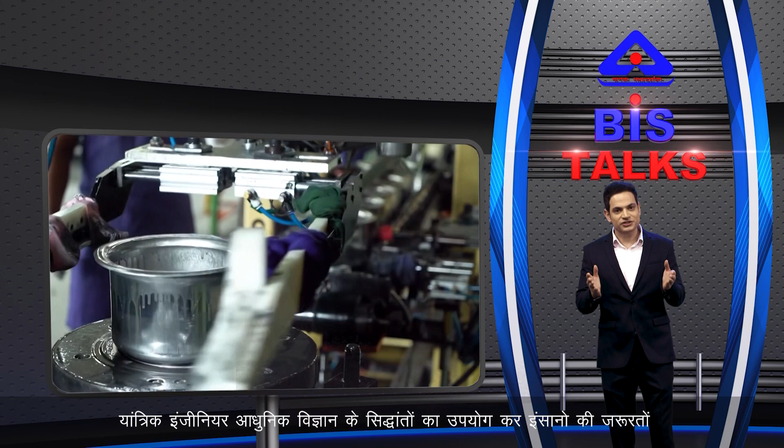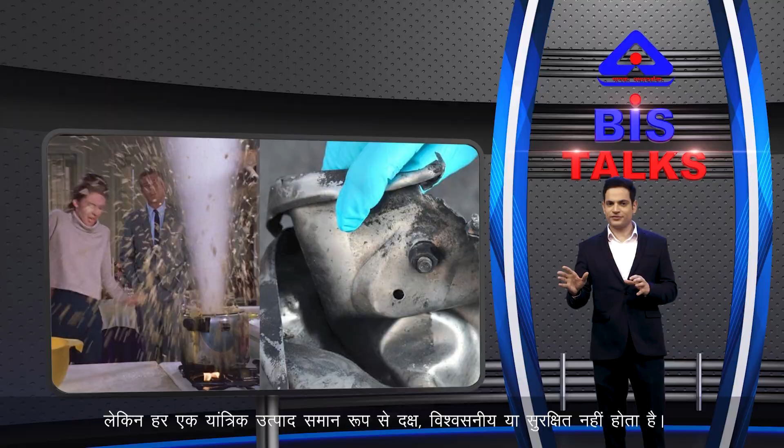Mechanical engineers use principles of modern science to create machines to meet a wide range of human needs. Hence, the objective of mechanical engineering is to create products that complement modern living in every way. But every mechanical product is not equally efficient, reliable, or safe. That's why it becomes even more important to make them follow seamless quality parameters specified in the BIS standards. When it comes to setting standards in India, the Bureau of Indian Standards is the ultimate authority.

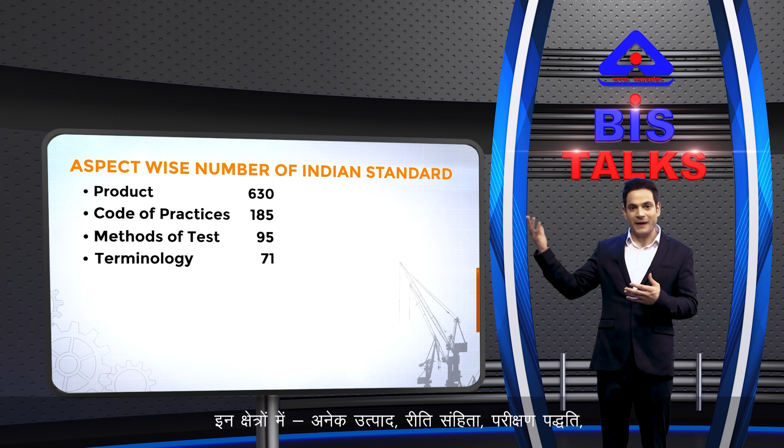Till date, the Mechanical Engineering Department of BIS has formulated around 1,356 standards. The division is responsible for a vast number of areas within its domain, touching our lives in multiple ways. These areas cover products, code of practices, methods of test, terminology, among many others, which we have listed here for you. BIS officers do not formulate standards in isolation. There is a streamlined mechanism to involve all relevant stakeholders of the particular field in the process of standard formulation. Let's first hear from the chairman of the council.

Mechanical Engineering Division of BIS oversees standards for heavy engineering, serving the core sectors of economy such as energy, mining, transportation, as well as the light engineering sector encompassing consumer goods to utility products. MEDC is organized with 28 technical committees entrusted with the responsibility of formulating, updating, and adopting standards needed for the products and processes. The technical committees are headed by industry experts in the respective domain to bring in latest concepts and standards needed for upgrading Indian products to compete in global markets.

MEDC is playing a pivotal role in evolving and upgrading standards, thereby uplifting the quality benchmark to make products globally competitive, which is vital for sustaining economic growth and boosting Indian economy. Let's hear from the head of the department who leads the effort of setting standards in BIS for the Mechanical Engineering Department. It is the constant endeavor of BIS to formulate standards and revise standards that are in line with national priorities and emerging technologies.

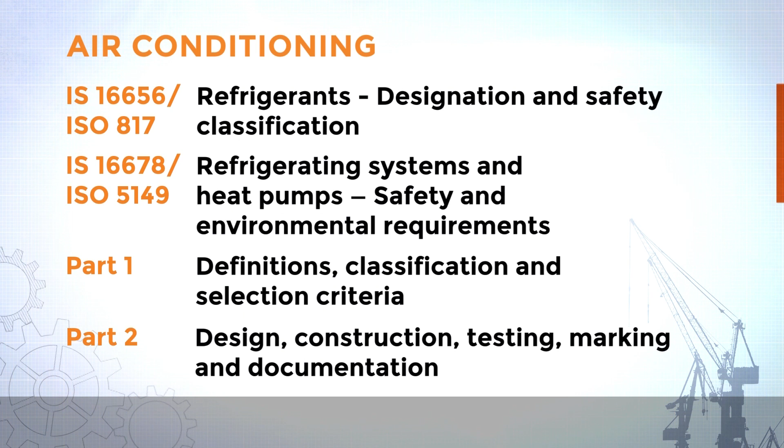Have you ever wondered what modern life would be without a refrigerator? I mean, not just about the ice and cold drinks, but the huge lot of conveniences they offer in terms of storing food and other stuff. Refrigeration helps in preservation of food and beverages, which in turn affects the health of an individual. It is also a source of income generation for small shops which sell commodities with limited shelf life.

Modern life also demands commercial refrigerating appliances like deep freezers, walk-in cold rooms, and display cabinets. I think you will agree with me that to be completely efficient and effective, they too need to follow seamless standards. Let's get more clarity on the subject from our expert.

The standard on household refrigerating appliances has been revised recently, where the direct cool and frost-free technology have been merged into a single standard. This standard specifies the essential characteristics of household refrigerating appliances cooled by internal natural convection or forced air circulation. The tests defined in the standards are meant to assess the fundamental design and operation of refrigerating appliances.

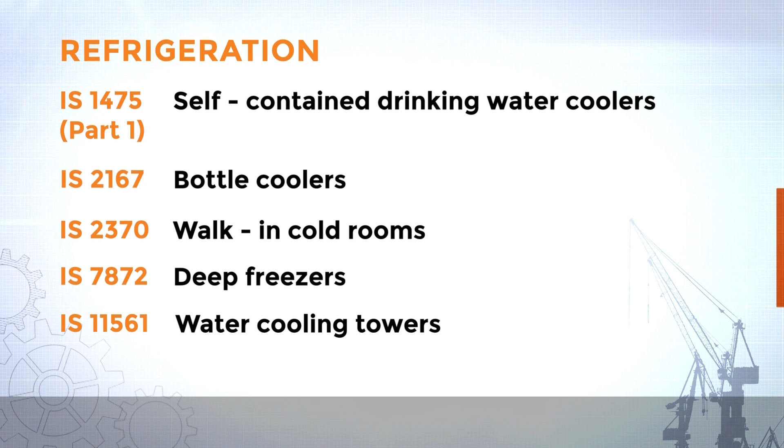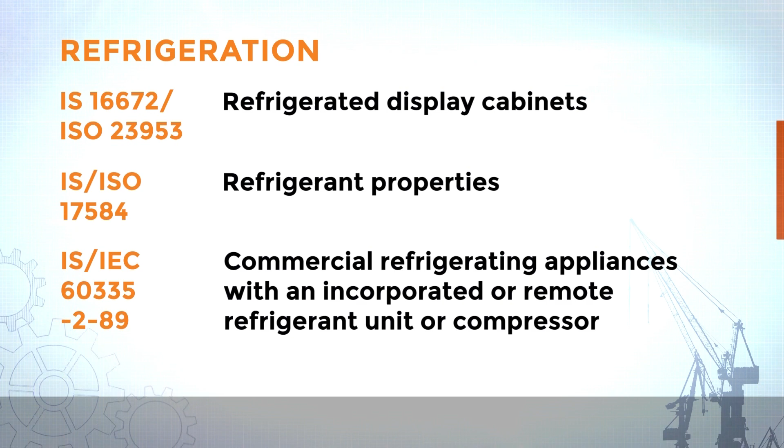Various tests such as storage test, cooling capacity test, freezing capacity test, mechanical strength test, electrical safety test, etc. are specified to ensure performance and safety. Here is the list of some of the key standards under this area. Let's move on to our next subject.

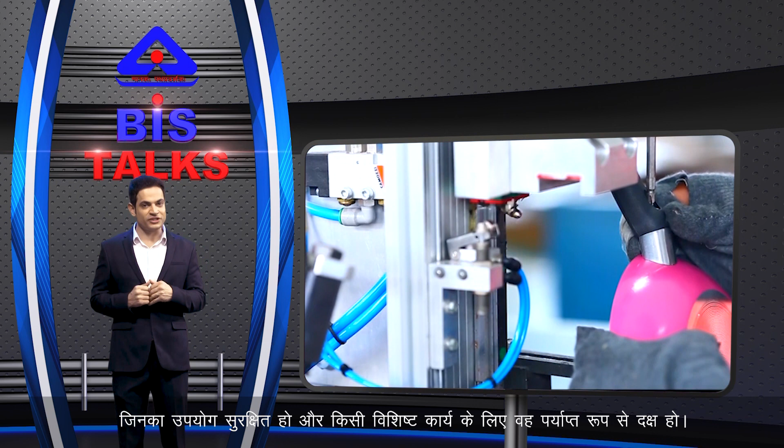I think there is no doubt in any of us that it's absolutely necessary to pick the utensils that are safe to use and efficient enough for the specific function. Also, the pots and pans we use for cooking and eating have to follow stringent quality parameters since they directly affect our health.

The most visible sign of implementation of these BIS standards could be seen on the humble, everyday pressure cooker. The pride of every kitchen should come with an ISI mark, that's for sure. IS 2347 covers the requirements for domestic pressure cookers.

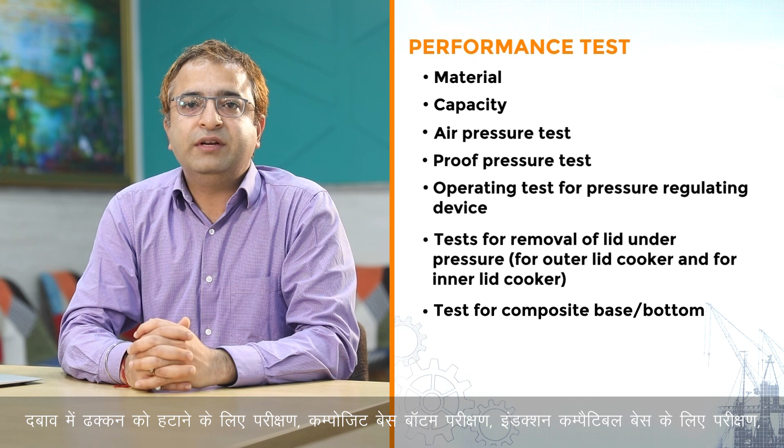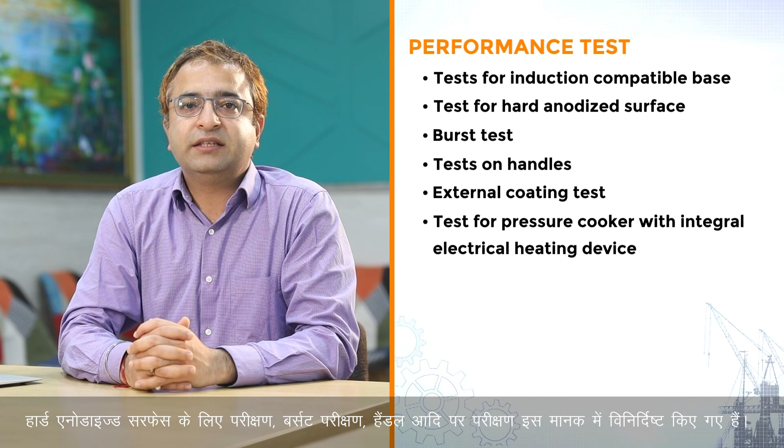To ensure the safety and quality of pressure cookers, performance tests like material, capacity, air pressure, proof pressure, operating test for pressure regulating device, test for removal of lid under pressure, test for composite base or bottom, test for induction compatible base, test for hard anodized surface, burst test, tests on handles, etc. have been specified in this standard.

Now for the other pots and pans we use to store, cook and eat food. Their quality too has a direct bearing on our health. For instance, the standard IS 14756 prescribes general requirements, quality of material and thickness for stainless steel cookware. IS 14756 lays down the requirements of cooking, serving, storage type of stainless steel utensils.

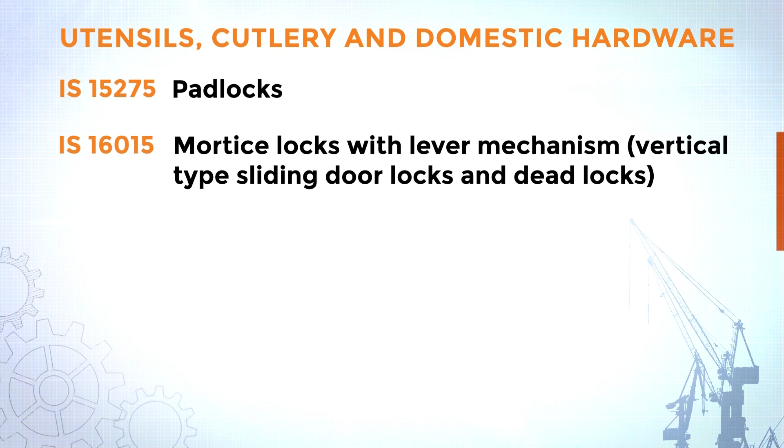To ensure the safety and performance, tests like material, staining, mechanical shock test, thermal shock test, dry heat test, coating thickness test have been specified in this standard. Other important standards under this area are listed here. Let's move on to our next subject.

Cooking gas mostly comes in the form of LPG or liquefied petroleum gas. This is the go-to cooking solution that we are so familiar with, and the risk factor gets minimized to negligible through the standards set by BIS. Let us now understand this better with a manufacturer who will acquaint us with the value of standards.

IS 3196 Part 1 standard is for manufacturing cylinders for liquefied petroleum gases (LPG). As all are aware, the LPG cylinder is an integral part of the kitchens for cooking purposes. This standard lays down the minimum requirements for the materials, design, manufacture, construction, tests and marking on these cylinders. Depending on the capacity, the construction can be a 2-piece or a 3-piece cylinder.

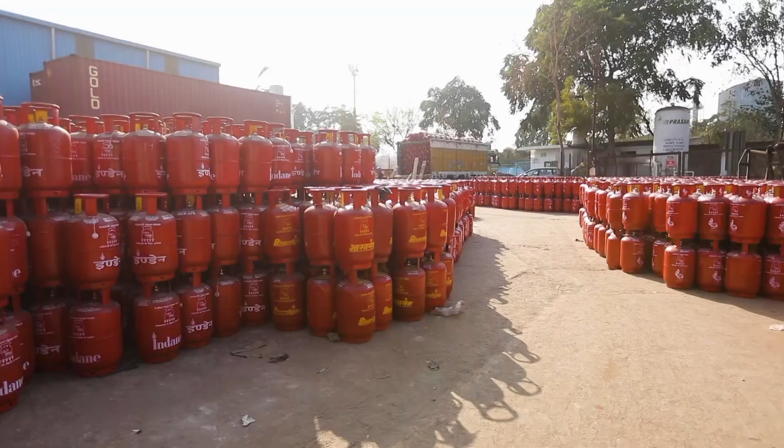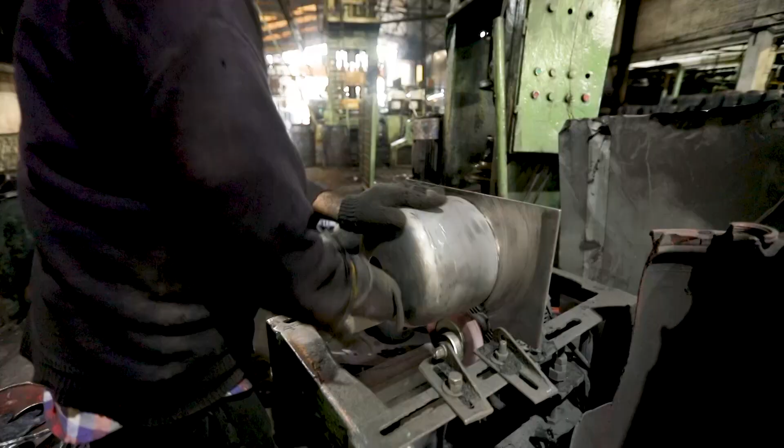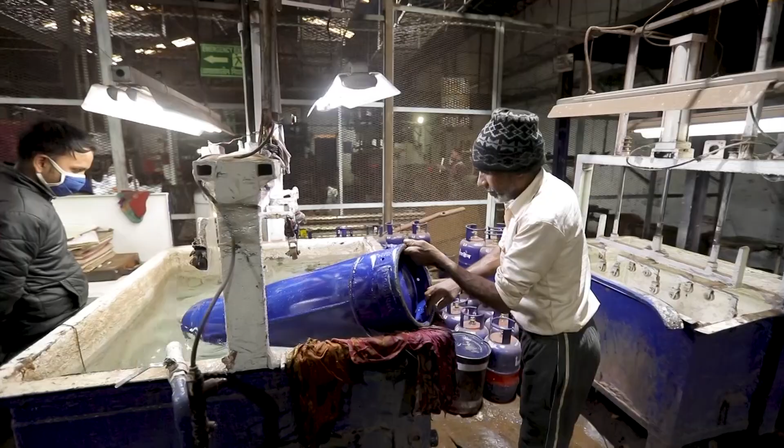This standard prescribes requirements like design, welding, minimum thickness, wall connection, foot ring, valve protection ring, heat treatment, etc. This standard also prescribes tests like radiographic examination, water capacity, hydrostatic test, pneumatic leakage test, fatigue test, hydraulic burst test, and mechanical tests to ensure safety of the cylinder. Other important standards under this domain are

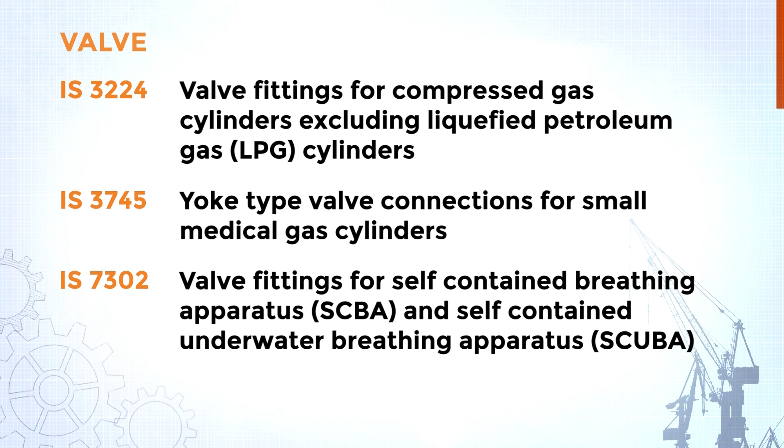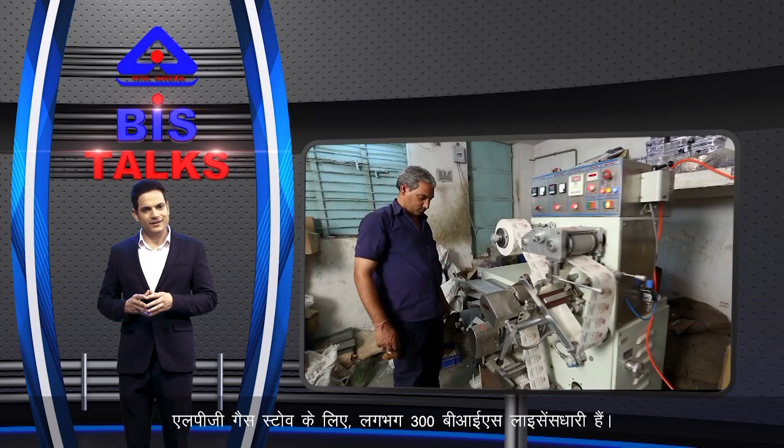Up next is the gas stove. The importance of this standard can be estimated by the fact that there are about 300 BIS licensees for one single product, the LPG gas stove. To make them safe, efficient and reliable, multiple tests are conducted before certifying LPG stoves, which have been specified as per IS 4246.

A relatively new entrant to the field is the gas stove for use with piped natural gas or PNG, which is covered by IS 17153. With more than 50 lakh users, usage of PNG as a cooking medium is now on the rise.

There are two standards on gas stoves, IS 4246 on LPG and IS 17153 on PNG. IS 4246, domestic gas stoves for use with liquefied petroleum gases, specifies construction, operation, safety requirements and tests for domestic gas stoves with metallic bodies with or without toughened glass top intended for use with liquefied petroleum gas at 2.942 kilonewtons per square meter gas inlet pressure.

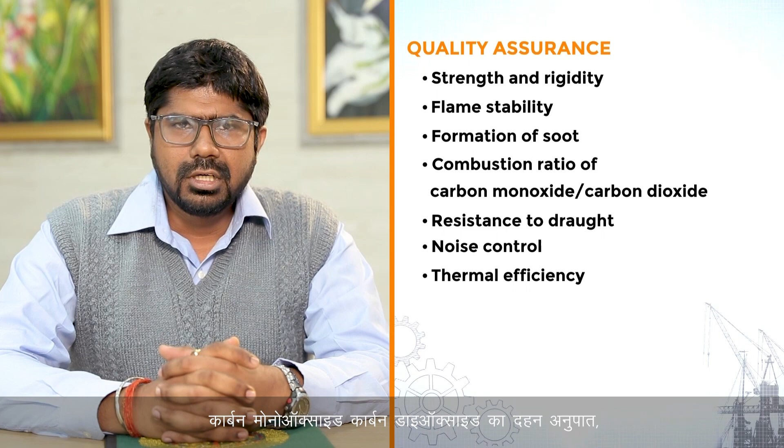To ensure the quality of the product and safety of the consumer, various tests are performed such as strength and rigidity, flame stability, formation of soot, combustion ratio of carbon monoxide to carbon dioxide, resistance to draught, noise control, thermal efficiency. The standard for PNG, IS 17153 domestic gas stove for use with piped natural gas, is similar to IS 4246. The difference is in delivery pressure of PNG, which is 2.14 kilonewtons per square meter, and minimum thermal efficiency of PNG stove is 50%, whereas for LPG it is 68%. Here is the list of some of the key standards under this area.

Let's move on to our next subject. IS 17018 Part 1 talks about the standard related to solar photovoltaic water pumping systems. Centrifugal pumps specifies the technical requirements for solar photovoltaic water pumping systems for handling clear cold water, covering design qualifications and performance specifications. Pump set of this system can be installed on a suitable bore well, open well, water reservoir,

water stream, etc. To ensure the quality of product and safety of the consumer, various tests are performed such as provision for earthing, sun simulator PV module tester, dry running, open circuit, short circuit, surge protection and total water per day. Here is the detailed list of more standards pertaining to this area.

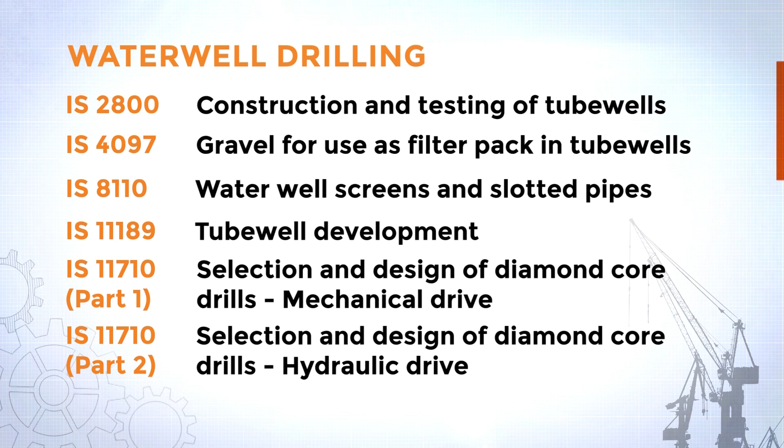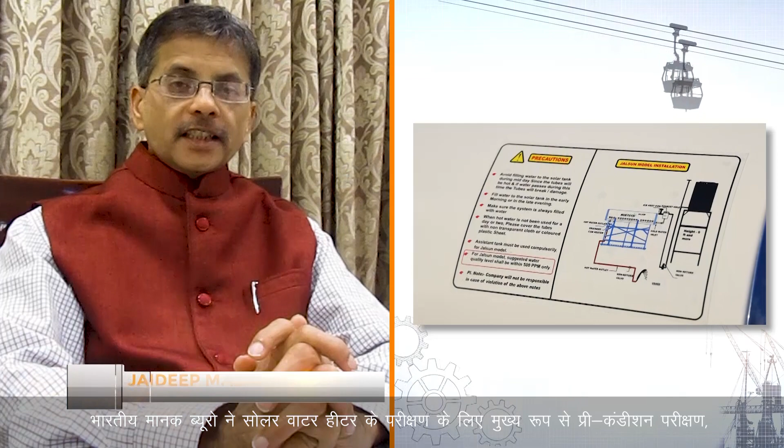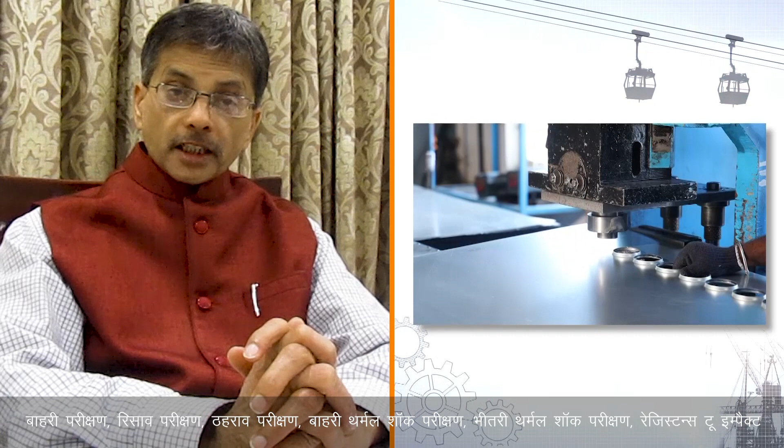Let's move on to our next subject. India is a land of abundant sunshine. This makes solar energy one of our most widely available natural resources, and this reflects in the increasing popularity of solar products. The Bureau of Indian Standards has laid protocols for testing for solar water heaters, namely precondition test, exterior test, leakage test, stagnation test, external thermal shock test, internal thermal shock test, resistance to impact, and thermal performance.

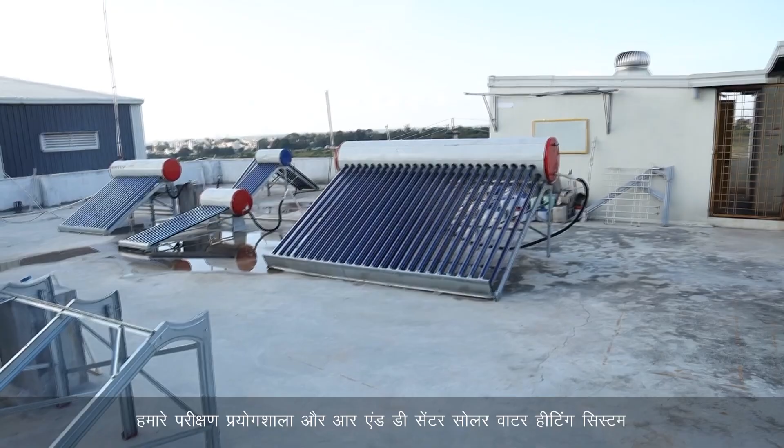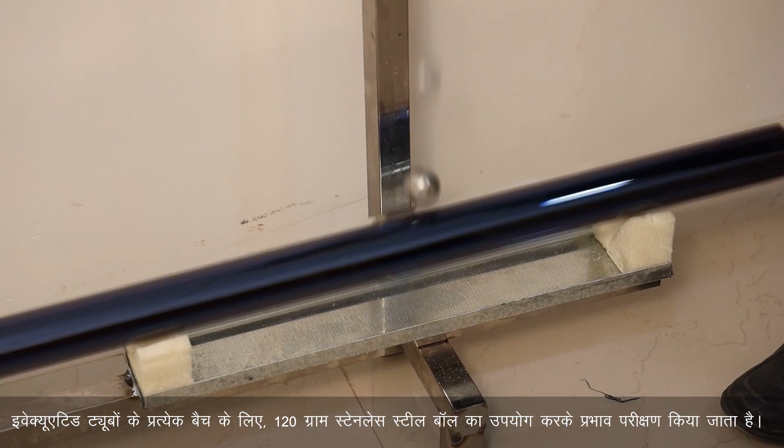Thermal performance is a measure of the efficiency of a solar water heater. It is measured as the difference of temperature at the beginning of the day and the heated water achieved at the end of the day. Higher the temperature, better is the quality of components used. Our testing laboratory and R&D center is established to test all raw material used in the solar water heating systems. For each batch of evacuated tube supplied, impact test using a 120 grams stainless steel ball is conducted.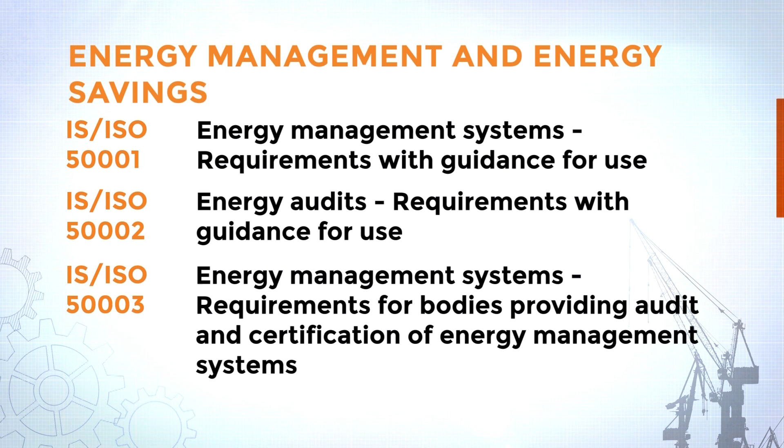Let's move on to our next subject. If we are asked to make a list of things we need for our complete peace of mind, I am sure most of us will have safety and security at the top of that list. Not just for our own selves, but also for the things that we value, stuff that we have earned and assembled by spending time and energy, our most important assets. Simply said, to keep our earnings and valuables safe, we need a safe.

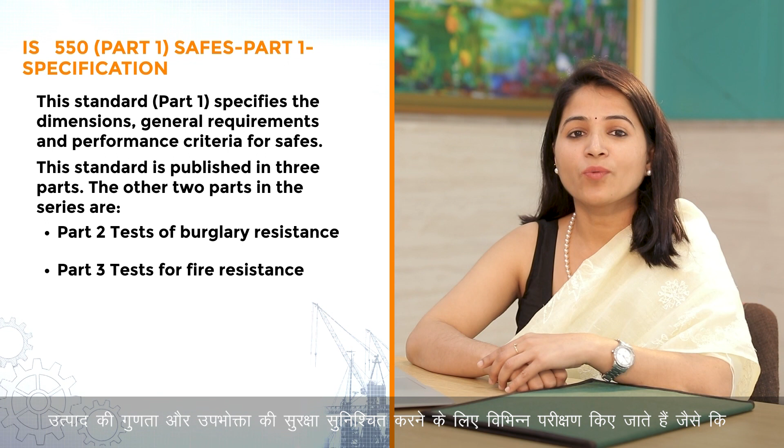IS 550 Part 1 specifies the dimensions, general requirements and performance criteria for safes used in financial institutions and commercial organizations. This standard is published in 3 parts. Other parts in the series are Part 2, Test for Burglary Resistance and Part 3, Test for Fire Resistance. To ensure the quality of products and safety of the consumer, various tests are performed such as burglary resistance, fire endurance, fire and impact test and lock operation test. Here is the list of some of the key standards under this area.

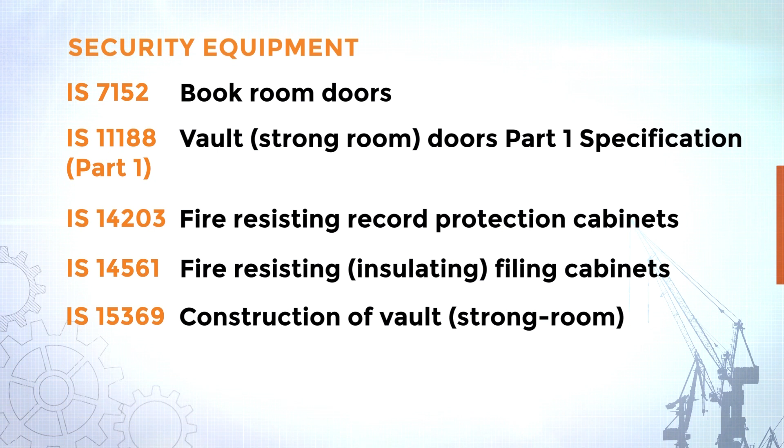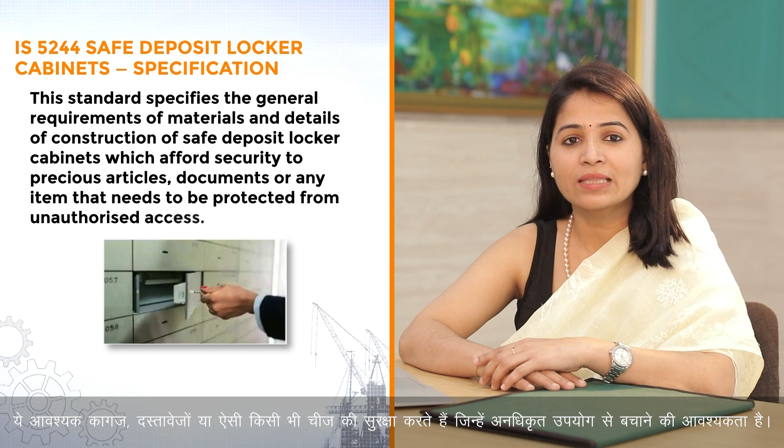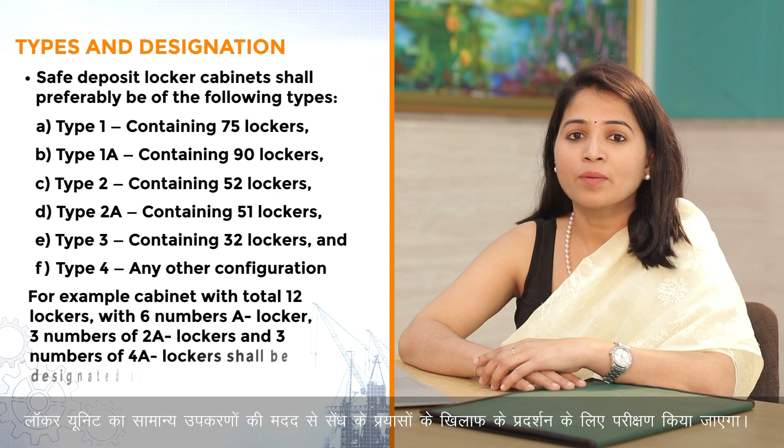IS 5244 is the standard specification for safe deposit locker cabinets. These afford security to the precious articles, documents or anything that needs to be protected from unauthorized access. To ensure the quality of the locker and safety of the consumer, the locker unit shall be tested for its performance against burglary attack with the common hand tools. The locker unit shall be able to successfully withstand such attacks for a period of not less than 15 minutes.

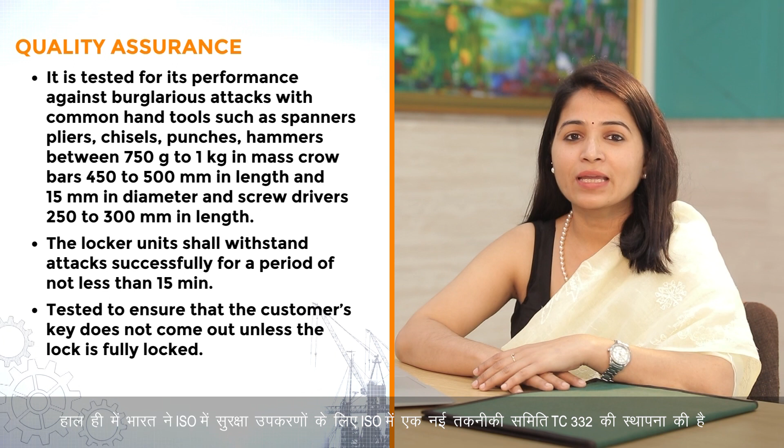Recently, India has also been able to establish a new technical committee TC 332 in ISO on security equipment, with India bagging the secretariat role for managing the committee. The department has also made its foray into national security. Numerous standards are under the process of formulation.

The subcommittee on standardization on ballistic security products has taken up the subject on BP Morcha, BP Bunker, BP Patka, Mobile Sentry Post and Observation Tower for standardization. As we all know, Indian Armed Forces, Central Armed Police Forces and other law enforcement agencies face threats from small arm ammunitions during flushing out operations, room interventions and other similar types of operations.

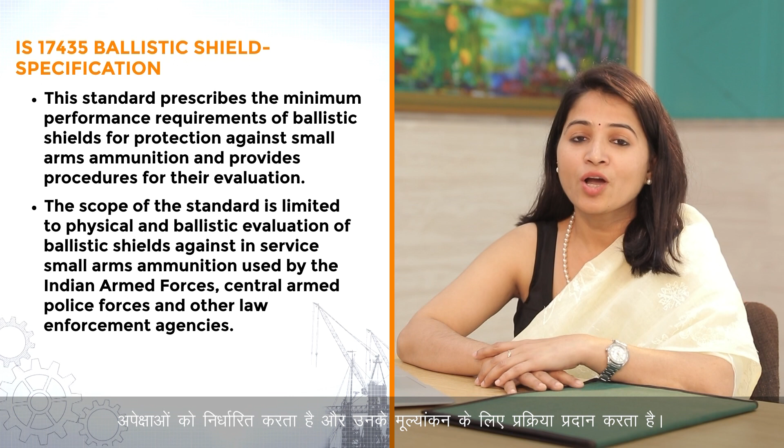Standardization in the field of personal safety has always been a challenging issue to render more secure products to operators and to consumers. Recently, BIS has published IS 17435 Ballistic Shield Specification. This standard prescribes the minimum performance requirement of ballistic shields for protection against small arm ammunitions and provides procedures for their evaluation. The scope of the standard is limited to the physical and ballistic evaluation of ballistic shields against in-service small arm ammunitions used by Indian Armed Forces, Central Armed Police Forces and other law enforcement agencies.

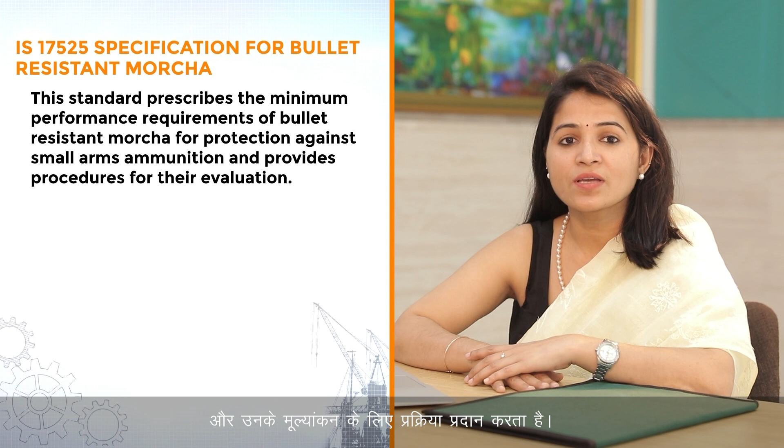To ensure the quality of the product and safety of the consumer, various tests are performed such as ballistic test, multi-hit test, wet test for polymeric material and extreme temperature test. IS 17525 specification on bullet resistant morcha. This standard prescribes the minimum performance requirement of bullet resistant morcha for protection against small arm ammunitions and provides procedures for their evaluation. The scope of this standard is limited to physical and ballistic evaluation of the morcha against in-service small arm ammunitions used by Indian Armed Forces, Central Armed Police Forces and other law enforcement agencies.

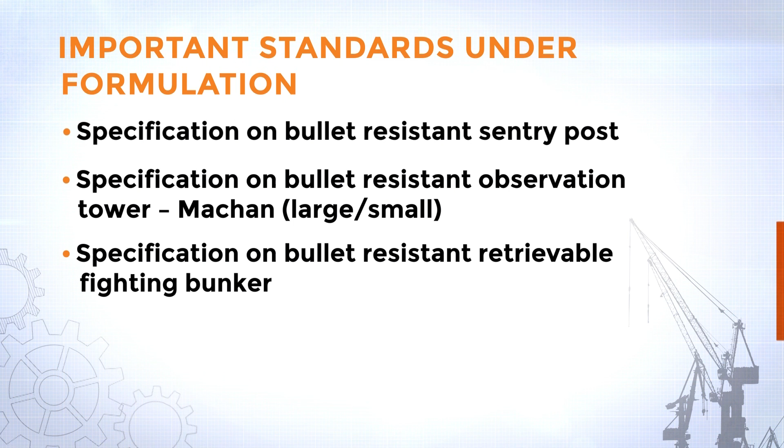To ensure the quality of the product and safety of the personnel, various tests performed on the products are ballistic test and multi-hit test. These standards are considered for procurement by various government agencies under the Ministry of Home Affairs and Ministry of Defence. Here is the detailed list of more standards pertaining to this area. Let's move on to our next subject.

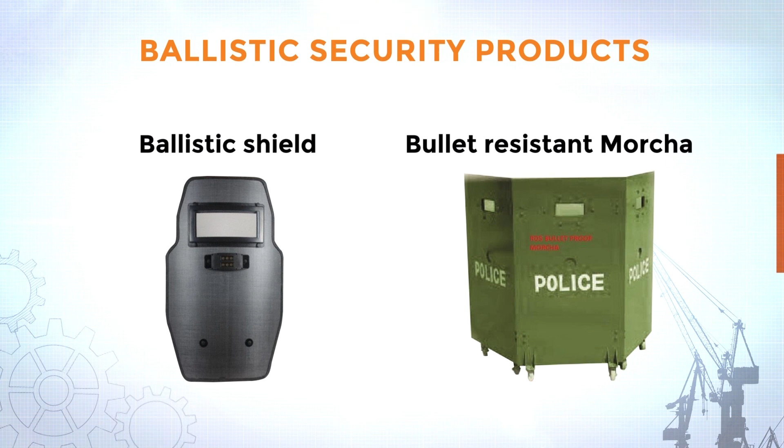The MED touches life in so many ways. We can't possibly cover all of them within the scope of this one show, but our story will be incomplete if I do not share with you another interesting area where mechanical engineering plays a major role. I'm talking about the ropeways. You must have seen them in the mountains, taking people and materials over steep inclines. This special form of transportation uses a tensioned wire rope supported above the ground to carry persons and materials. With modest power demands and no need for tracks or roads, they also help in preserving the environment.

Standards on ropeways cover the design and construction of continuous movement monocable aerial ropeways with fixed grips or automatic grip, to and fro movement bicable aerial ropeways, reversible movement monocable aerial ropeways with fixed grips, unidirectional intermittent movement monocable aerial ropeways with fixed grips, and continuous movement bicable or tricable ropeways with detachable grip, intended for the transportation of passengers and goods. To ensure the quality of the product and safety of the consumer, various tests are performed such as capacity test, wind action test, maximum speed and minimum spacing between vehicles or group of vehicles, rope guiding, crossings and dangerous areas.

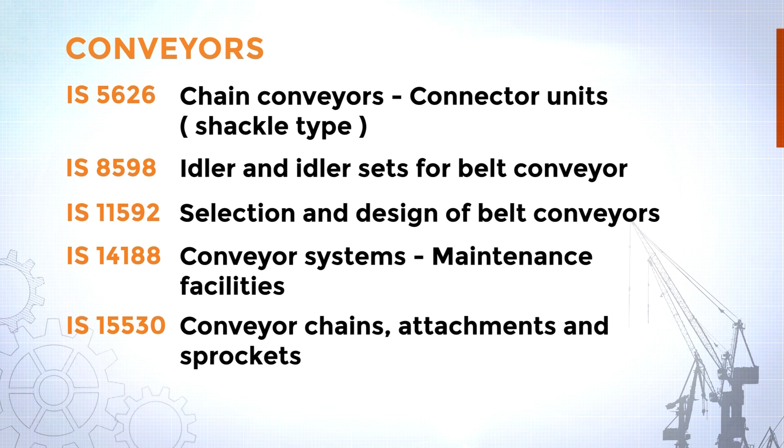Another important product under the same category is amusement ride. IS 15475 Part 1 to Part 6 deals with the code of recommended practice for amusement ride safety: general information, design, manufacture and erection, selection, training and supervision of operators, operation and maintenance, procedures and performance tests. Various tests performed to ensure safety of amusement rides are operational limits of rides, forces or dynamic effect on passengers, maximum exposure time per element of ride, reaction of the ride structure to collision, safety against slipping, safety against overturning, safety against drifting and endurance test. Here is the detailed list of more standards pertaining to this area. Let's move on to our next subject.

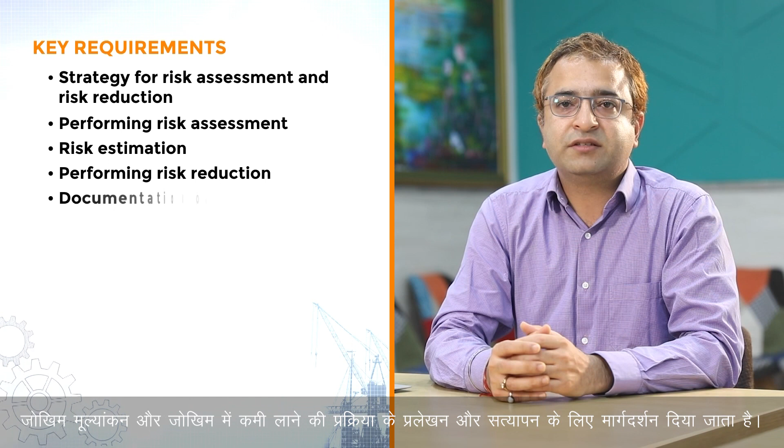IS 16819 is adoption of ISO 12100. This is a Type A safety standard. This standard specifies basic terminology, principles and methodology for achieving safety in the design of machinery. It specifies principles of risk assessment and risk reduction to help designers in achieving this objective. Procedures are described for identifying hazards and estimating and evaluating risks during relevant phases of the machine life cycle, and for the elimination of the hazard or the provision of sufficient risk reduction. Guidance is given on the documentation and verification of the risk assessment and risk reduction process. This standard provides strategy for risk assessment and risk reduction.

IS 3177 standard covers requirements for design, manufacture, inspection and testing of electric overhead travelling cranes and gantry cranes for use in steelworks and other locations. This code is extensively used by designers, consultants, and heavy industry like the steel industry for lifting loads in indoor and outdoor applications. Based on average working hours per day and minimum average total life in working hours, this code classifies cranes as M1 to M8 types. This code covers both mechanical as well as electrical aspects of the crane.

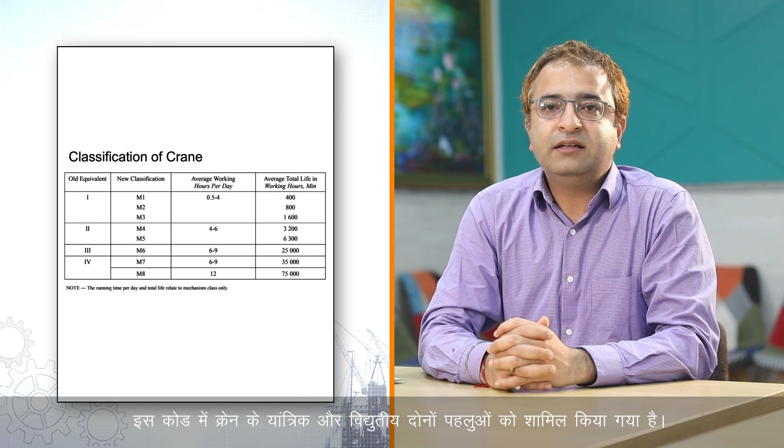Regarding mechanical aspect, requirements for design procedure, hooks, wire ropes, sheaves, track wheels, buffer, bearings, gearbox, lubrication system, rails, operating cabin, platform, etc. have been specified. Regarding electrical aspect, requirements for power supply, cable and conductors, electrical protective and safety equipments, contactors, emergency switches, design and selection of motors, crane controls, lifting magnets and load holding devices etc.

have been specified. For safe operation of the crane or in idle condition, tests like main hoist and auxiliary hoist, cross travel motion, bridge motion, that is long travel, no load test, overload test have been specified.

IS 4573 Power Driven Mobile Cranes Specification. This standard covers wheel mounted or crawler mounted power driven mobile cranes of the fully mobile, full swing, part swing, non swing type, truck mounted fully mobile, full swing, part swing and non swing type, and semi mobile and portable type cranes. Various tests such as functional test, overload test, testing of indicators, stability test and performance test with rated load are performed to ensure performance and safety.

I will talk about IS 5456 that is related with compressors. This standard prescribes type test and routine test for both reciprocating and rotary type positive displacement air compressors and exhausters. This standard does not deal with centrifugal and axial flow compressors and machines giving a pressure rise of less than 0.01 megapascal and greater than 6 megapascals.

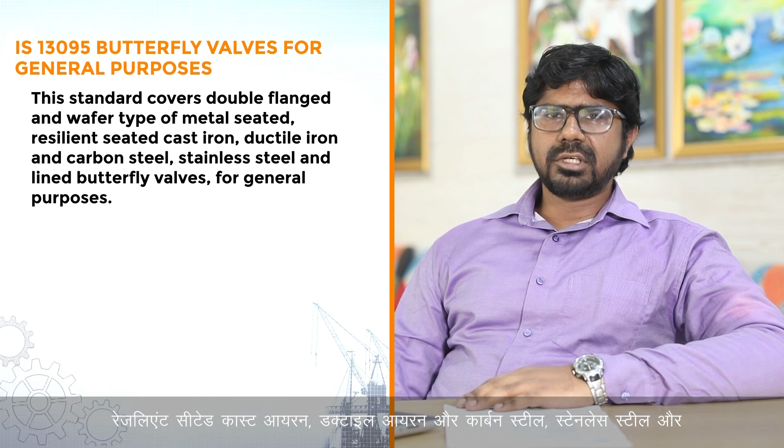IS 13095 Butterfly valves for general purposes covers double flanged and wafer type of metal seated, resilient seated cast iron, ductile iron and carbon steel, stainless steel and lined butterfly valves for general purposes. Valves covered under this standard are manually, pneumatically, hydraulically or electrically operated. Various test requirements recommended for quality assurance are performance testing, body testing, seat test, disc strength test.

ISO 10821 is on industrial sewing machine safety requirement for sewing machines, units and systems. This standard specifies safety requirements applicable to sewing machines, units and systems designed for professional such as industrial, commercial or laboratory use in industries including clothing, footwear, leather goods, shirts, knitwear, gloves, upholstery, packaging industry, shoe repair, etc.

The significant hazards, hazardous situations and events identified in the risk assessment are significant for this type of machine and require action to eliminate or reduce the risk. Safety measures and requirements for mechanical equipment, electrical equipment, control gears, thermal requirement, noise radiation, ergonomics, etc. are provided. Here is a detailed list of more standards pertaining to this area.

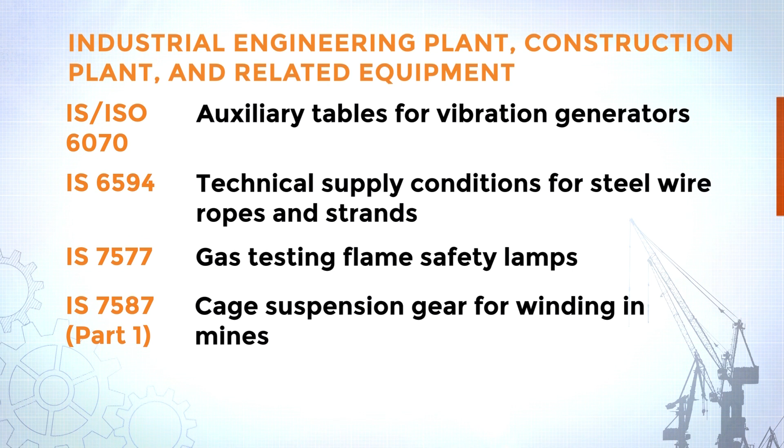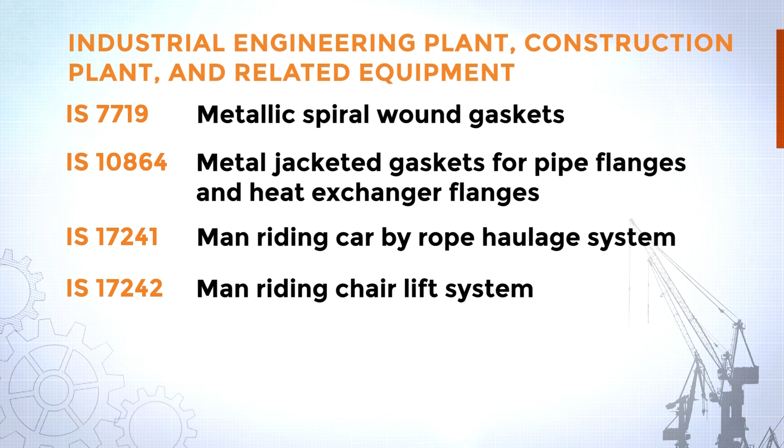Standards are the milestones of a nation's performance and well-being. Compliance to them is an absolute necessity with no exceptions. BIS ensures compliance to the existing Indian standards and systematically tries to bring new subjects within the sphere of standardization to keep pace with the latest technologies.

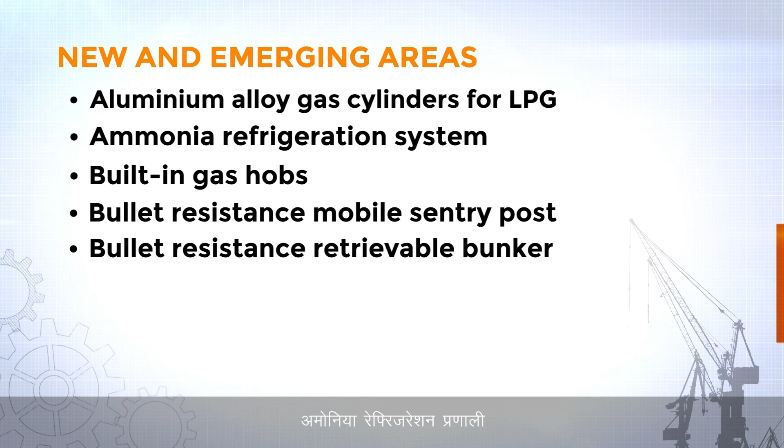Some of the new and emerging areas are aluminum alloy gas cylinders for LPG, ammonia refrigeration system, built-in gas hobs, bullet resistant mobile sentry post, bullet resistant retrievable bunker, combo valve, gas stoves with ceramic burner, hand pump cum solar pumping system, insulated flask, insulated container, low pressure cooker, 990 liter LPG cylinders, multiple split system air conditioners, observation tower, portable LPG appliances and residual pressure cylinder valve.

In order to make the standardization process more transparent and open, BIS has digitized the standardization process and launched eBIS portal so that all the stakeholders, be it manufacturers, consumers, users, etc., can participate in the standardization process in a constructive way by submitting new work item proposals for standard formulation, reviewing published Indian standards, providing comments on draft standards under wide circulation, and applying for membership in the technical committees.

The BIS e-governance portal, Manak Online, provides a comprehensive view of its activities including on standardization. This portal serves BIS technical committee members and also other users of Indian standards. Filters to view the aspect-wise Indian standards classified based on test methods, product specifications, codes of practices, etc. are also available. The list of Indian standards relevant to various ministries and departments can also be accessed online.